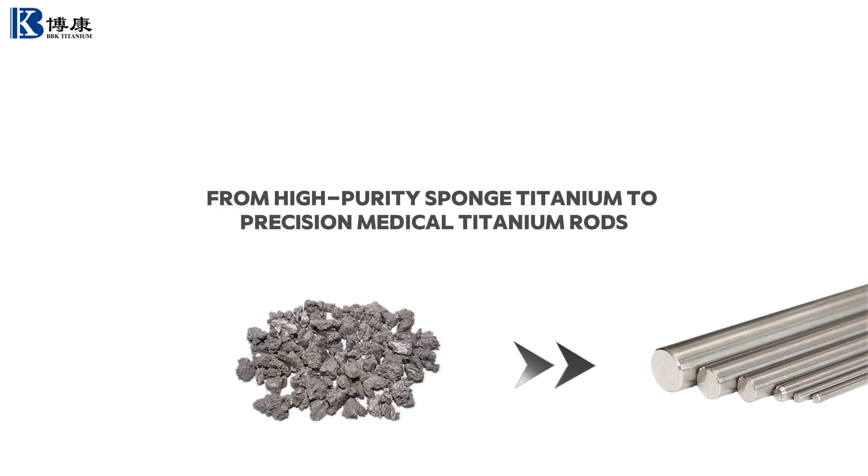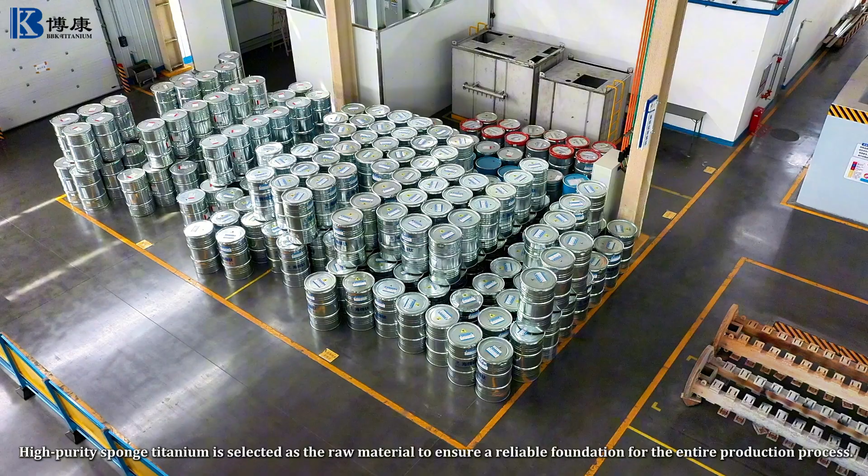From high-purity sponge titanium to precision medical titanium rods, every manufacturing step is strictly controlled to ensure stable performance and reliable quality. Sponge titanium. High-purity sponge titanium is selected as the raw material to ensure a reliable foundation for the entire production process.

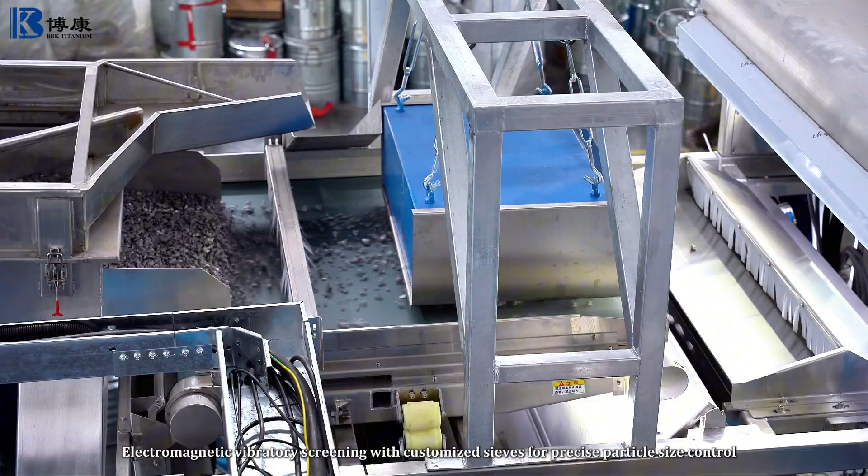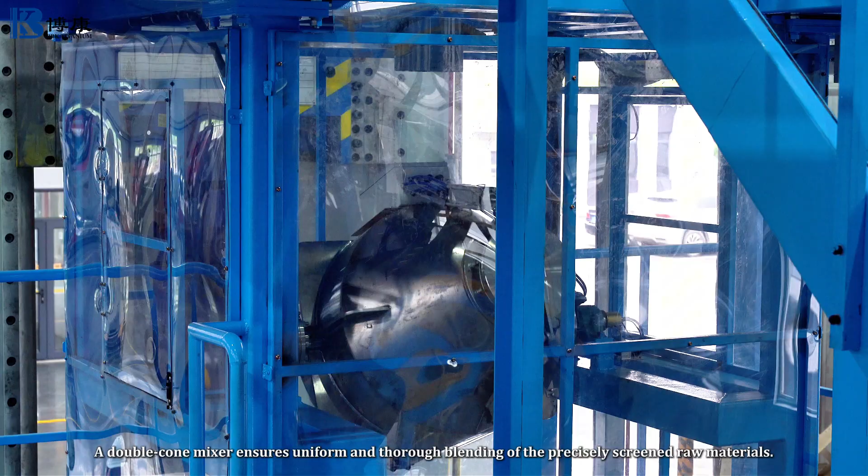Raw material screening. Electromagnetic vibratory screening with customized sieves for precise particle size control, followed by magnetic separation and photoelectric impurity removal to ensure the purity of titanium sponge. Automatic mixing. A double cone mixer ensures uniform and thorough blending of the precisely screened raw materials.

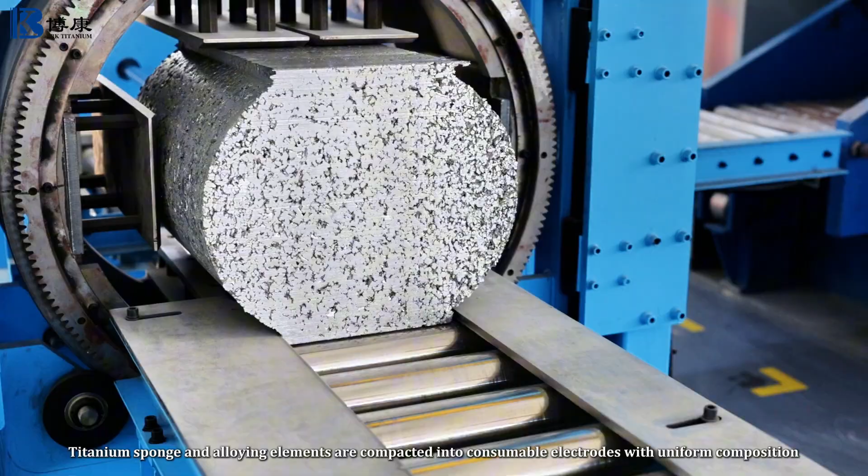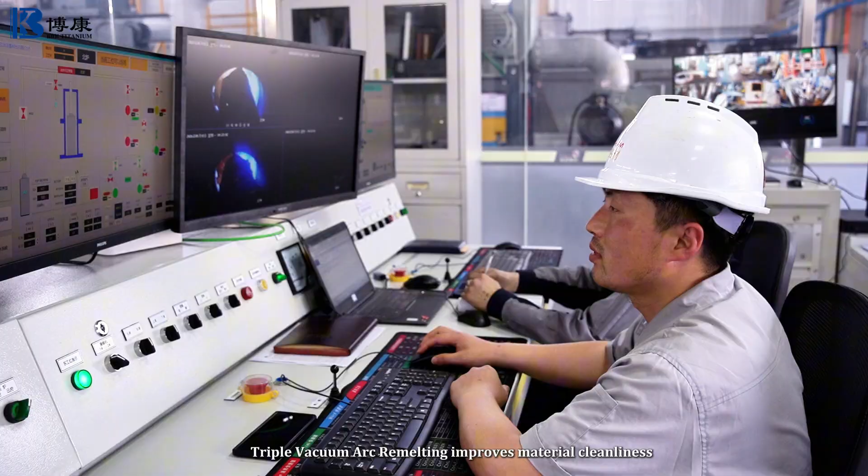Compacting electrodes. Titanium sponge and alloying elements are compacted into consumable electrodes with uniform composition. Electrode welding. Electrodes are precisely welded to ensure stable and continuous melting. Triple VAR melting. Triple vacuum arc remelting improves material cleanliness, chemical consistency, and internal structure uniformity.

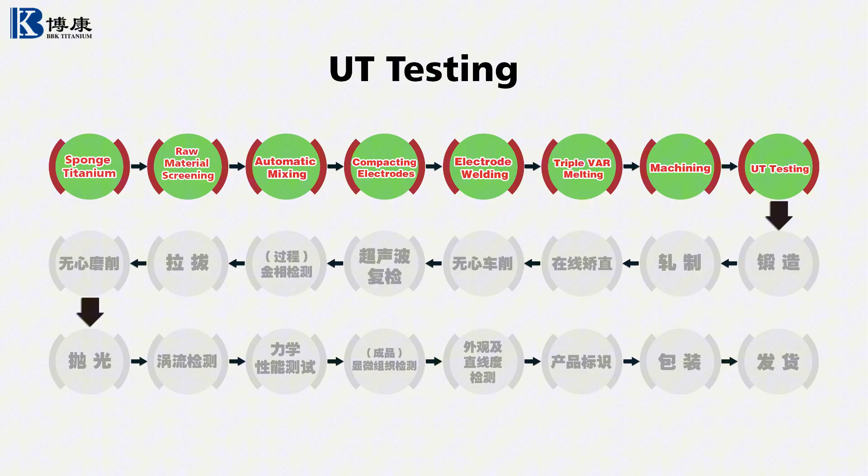Machining. The titanium ingot surface is machined to remove defects before further processing. UT testing. Ultrasonic testing is performed to verify internal quality and detect potential defects. Forging billet. Forging refines the grain structure and improves the overall mechanical properties.

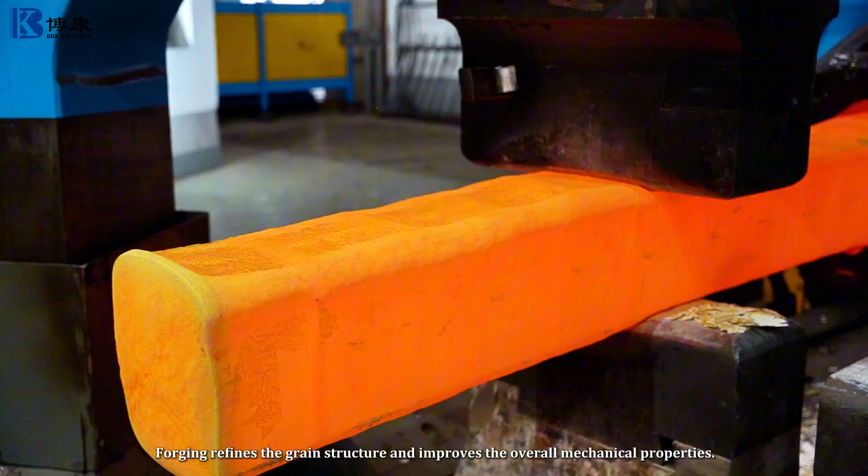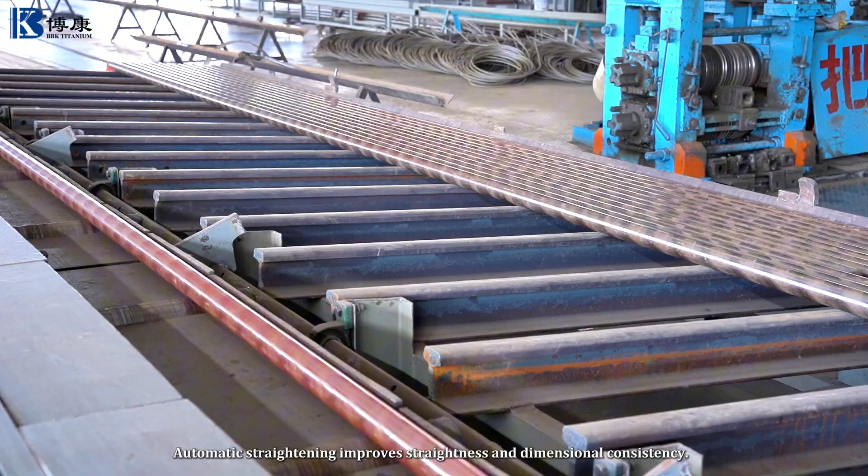Rolling billet. The billet is rolled to achieve the required dimensions and material properties. Online straightening. Automatic straightening improves straightness and dimensional consistency. Centerless lathe. Centerless turning removes the surface layer and improves dimensional accuracy.

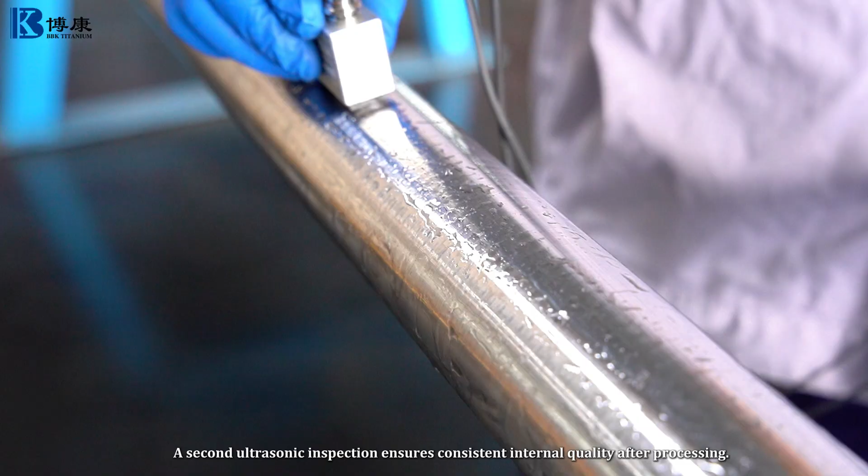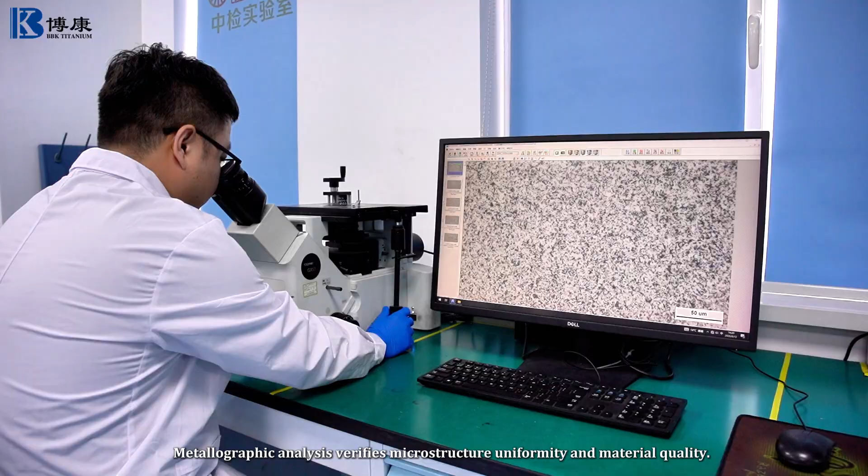UT testing. A second ultrasonic inspection ensures consistent internal quality after processing. Metallographic inspection. Metallographic analysis verifies microstructure uniformity and material quality. Wire drawing. Wire drawing improves dimensional accuracy and surface quality.

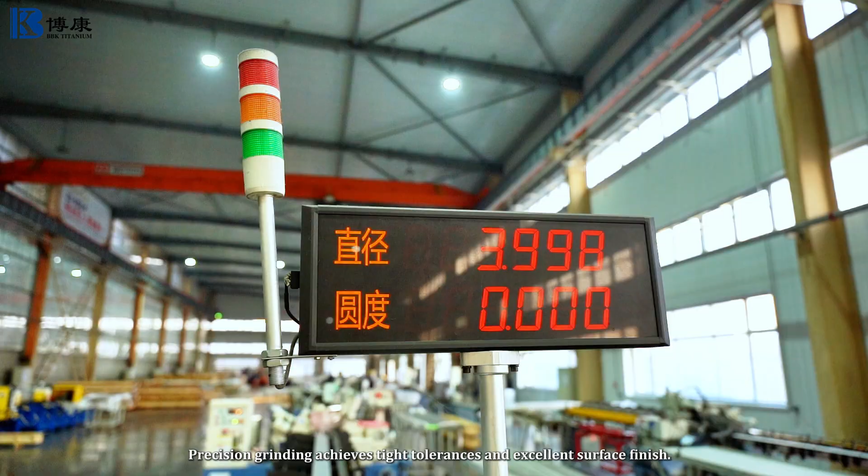Centerless grinding. Precision grinding achieves tight tolerances and excellent surface finish. Polishing. Polishing improves surface quality for medical applications. Eddy current testing plus eddy current diameter measurement. Eddy current testing identifies surface and near-surface defects.

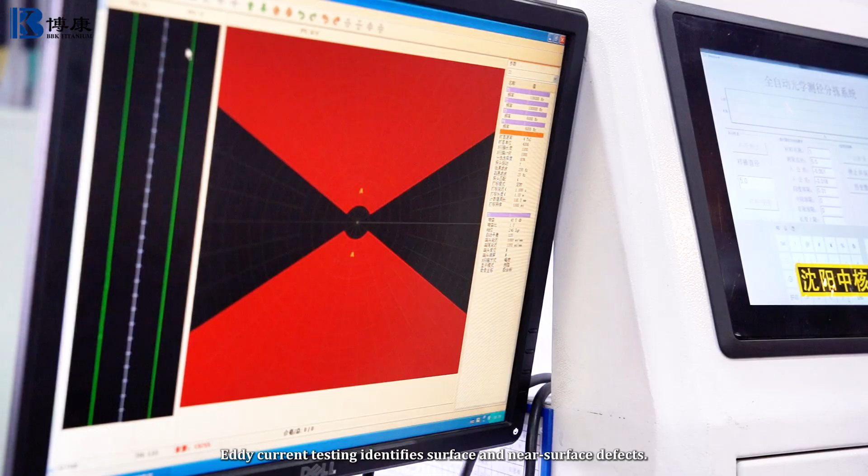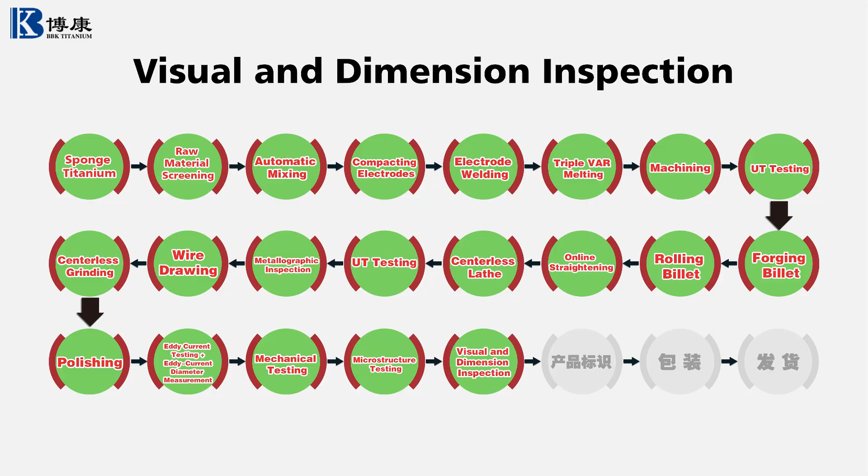Mechanical testing. Mechanical properties including tensile strength, yield strength, and elongation are tested. Microstructure testing. Microstructure analysis ensures compliance with material requirements. Visual and dimension inspection. Final visual and dimensional inspections ensure products meet customer specifications.

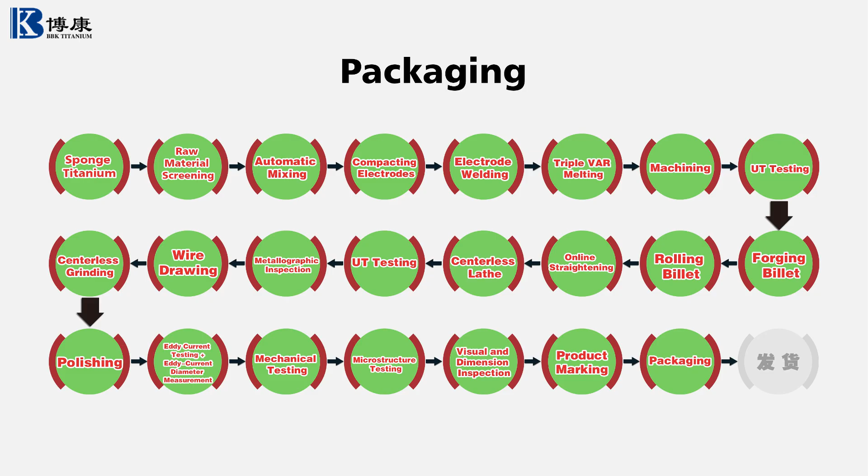Product marking. Each titanium rod is marked for complete product traceability. Packaging. Products are professionally packed to ensure safe transportation. Delivery. After final quality approval, titanium rods are delivered to customers worldwide.

From raw material selection to final delivery, Bokang Titanium controls every production stage to provide high-quality medical titanium materials for global healthcare industries.